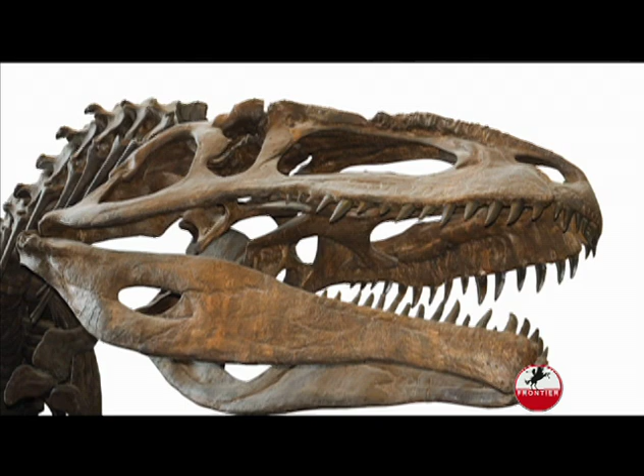Long before us, huge beasts walked the earth. Little did they know that 65 million years later, they would be helping to move our society forward. Natural gas and petroleum are created from the remains of plants and animals. When nature mixed their remains with mud and covered it by heavy amounts of sediment and high amounts of pressure and heat for millions of years, the matter eventually changed into kerogen, a material found in oil shales. With more heat added, it changed into liquids and gaseous hydrocarbons known as fossil fuels. Three of these are coal, natural gas, and petroleum.

Early civilizations used petroleum from oil pits for lighting, and according to the Greek historian Herodotus, the Babylonians were able to use oil and asphalt to build their towers and walls. The Romans perfected the use to build up their empire, but the science of removing oil from deep within the earth would come from the other side of the world. In 347 AD, Eastern cultures such as China and Japan were the first ones to drill for oil using bamboo poles with drill bits attached to the ends. Some of these wells were as deep as 800 feet.

First written about in the mid-800s by the Persians, the process of distilling crude oil into a kind of kerosene, as well as other hydrocarbon compounds, developed into an art form. By distilling oil, same way you would alcohol, you could get kerosene out of that. And that's kind of how oil began. The goal was to create a clean and safe lighting material, and many tried. It was only in the 1840s when Gesner and Young advanced the distillation process into what is known as kerosene that this became a reality.

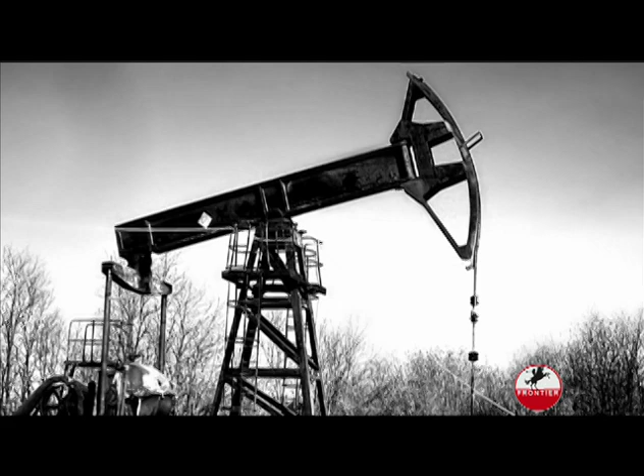One problem still remained. Because of the process it took, kerosene was very expensive. So for some time the main fuel was whale oil from the blubber of various whale species. Then in the 1850s, the process to distill kerosene from petroleum was perfected, which provided a cheaper alternative to whale oil. The demand for petroleum grew quickly around the world, and the first commercial oil well was drilled in Poland in 1853. Gasoline as we know it today had little use at the time.

Kerosene was the primary product, and gasoline was just considered a waste byproduct. It was so unappreciated that gasoline was even dumped into rivers. But that would all change with the invention of the internal combustion engine and then the automobile. It really took off as we started driving cars. With the increase of the number of automobiles and even more uses for fuels, the industry focused on petroleum as gasoline, and it became the primary product that it is today.

Within no time, the need for oil was huge. In the United States, demand of fuel led to oil booms in states such as California, Oklahoma, and Texas. With these booms, the U.S. overtook the Russian Empire as the top petroleum producer in the world.

Years later, on a prairie in southern Wyoming is where Frontier Refining's history began. Capital Oil and Refining Company was started by two Cheyenne entrepreneurs in 1934. By 1940, the company became the Frontier Refining Company, and its production capacity increased to 1,800 barrels a day.

During World War II, petroleum was very important for the war effort. It kept jeeps, tanks, and airplanes in the fight. In Europe, the Allies bombed Axis industry, including oil production facilities. While the bombing continued with the goal of decreasing enemy gas power, here at home the U.S. government was looking to produce more. They were specifically looking for an inland source of 100-octane aviation fuel.

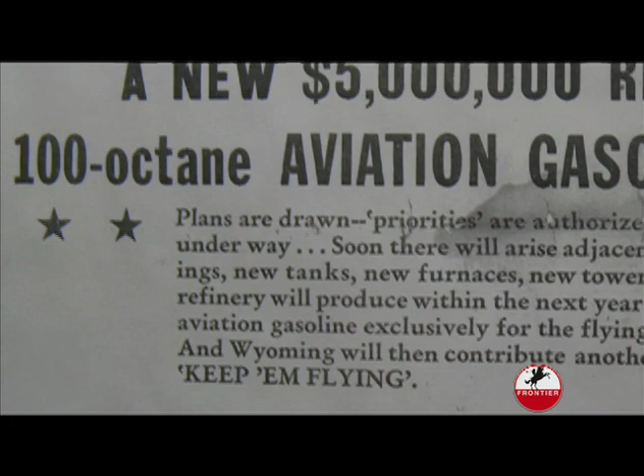After much lobbying by Wyoming politicians, it was decided that 2 refineries would be built in the state, one at Parco or Sinclair, Wyoming, and the other one adjacent to the Frontier Refinery in Cheyenne. Frontier oversaw the construction and operated the refinery for the government. At the end of the war, Frontier purchased the refinery and converted it to produce automotive fuel and other petroleum products.

Up to the mid-1950s, the world's primary fuel was coal, but this would soon change as oil made its way to the forefront for our energy needs. In 1957, Frontier had what at the time was a simple yet revolutionary idea. To clean up the look of the refinery, why not add some color? Frontier was the first to paint its tank farm with pastel paint, leading to a practice that has become common

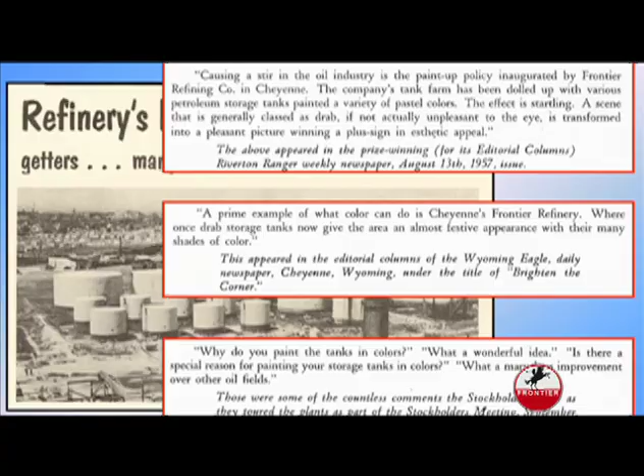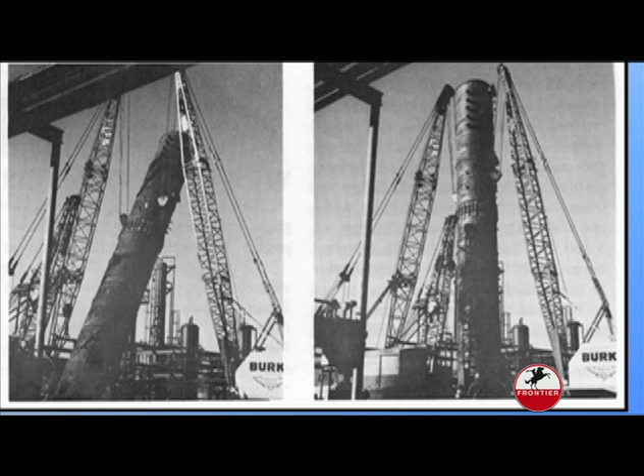in the industry. Throughout the years, Frontier continued to move forward, whether supporting our national defense, expanding its own facilities, adding new technology, increasing its capabilities, or just being involved in the local community. For Frontier, the focus always has been on creating usable materials while calling Wyoming home.

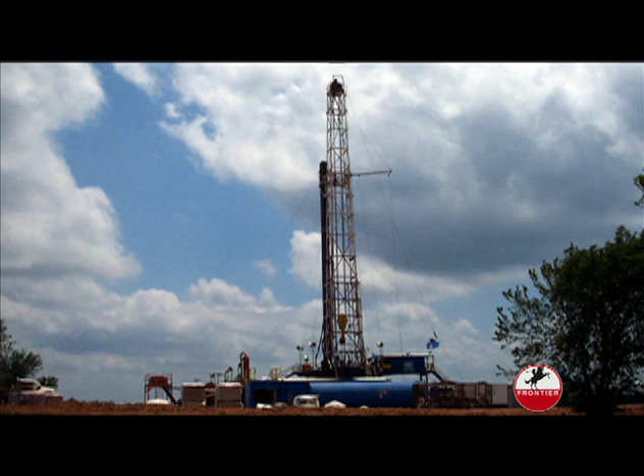Politics and world situations have always had an effect on economies, and petroleum is no different. Yet despite the oil crisis of the 1970s and the challenges the world faced at that time, Frontier Refining continued to produce. Today, the top 3 oil-producing countries are Saudi Arabia, Russia, and the United States. And in the U.S., petroleum makes up 40% of our total energy consumption. Gasoline is a portable energy source that powers 90% of our vehicles.

There's gasoline, diesel, jet fuel. We use it for pretty much everything that we transport. Petroleum also works as the base for many industrial chemicals and a host of products, including plastics. Pretty much everything that we use, oil has something to do with it. Frontier Refining can refine 52,000 barrels per day and employs 280 locals. Frontier continues to serve the needs of the Front Range, and most of the fuel in Cheyenne is bought directly

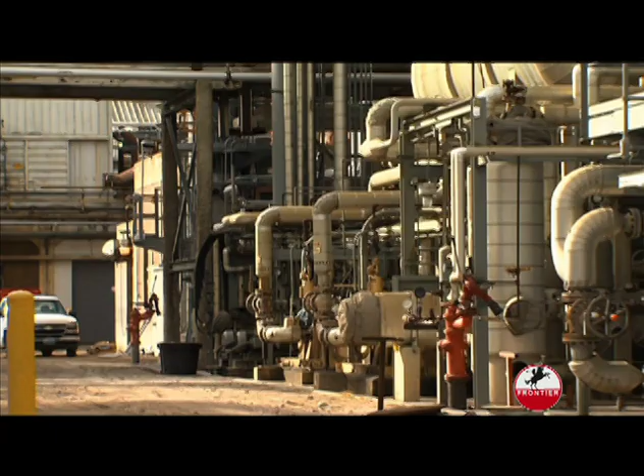from the refinery. The progression of petroleum has been a long one, from the fossils of the earliest life forms to the innovations of ancient civilizations, from the kerosene that lit our way to the substance that powers our daily lives. With all the materials that can be created, petroleum is known as the mother of all commodities. And then, of course, it's come to what it is today. We're basically dependent on it. And at Frontier Refining, we will continue to produce the fuel for our future.

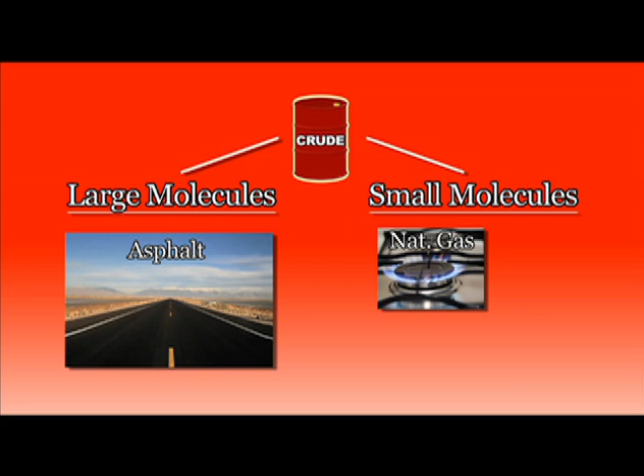Crude itself is a combination of large molecules and small molecules. The large molecules are the molecules like you see with asphalt that goes into the pavement on the street. Some of the small molecules are the natural gas, propane that's used for heaters, butanes, all of those things; the gasoline, the diesel components, are all actually occurring in the crude. We use distillation to separate these products. Distillation is a key part of the refining process.

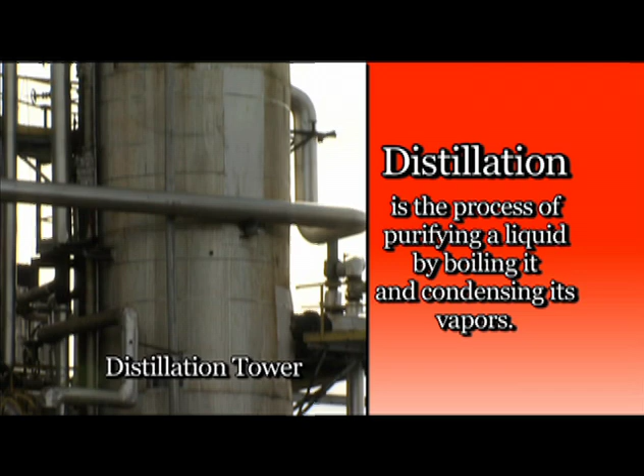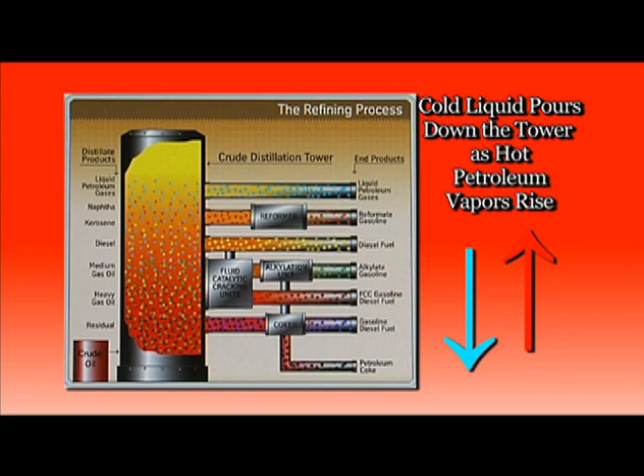You heat up a mixture, part of that mixture will boil, very similar to heating up water on a stove. Part of that mixture will become vapor and rise, just like your water will turn to steam and come out the vent on your teapot. Those vapors rise up the distillation tower, and at the same time, we have cold liquid pouring down the distillation tower. The tower has a number of distillation trays in it, and the contact between the hot vapors and the cool liquid will help the separation between the various molecules.

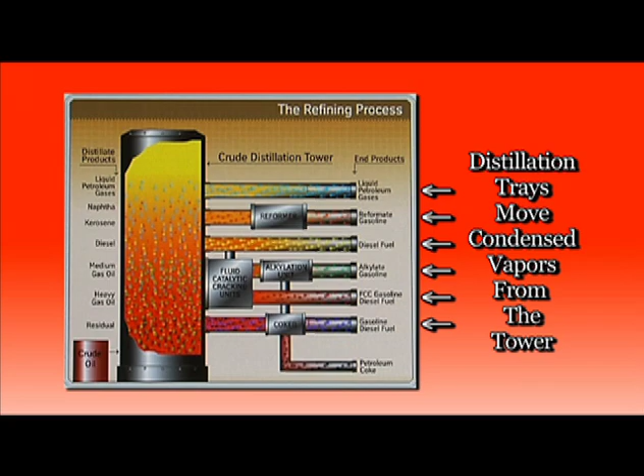The light material will come off the top of the towers. Some of the very light material will become part of our fuel gas that we burn in our heaters. Next range molecules become gasoline type molecules. Then we'll have another set of molecules that come off at a different set of temperatures and pressures that are diesel range. At the bottom of that tower, we'll have a heavier liquid that remains liquid, we call gas oils and the asphalt material. Some of the crude oils we have will have 40% of it will be gasoline and diesel. Some of them will be up to 60% naturally gasoline and diesel.

What we produce here at the refinery is anywhere from 70 to 80% of our crude oil becomes gasoline and diesel. So what that means is we have to take 20 to 30% of the heavy components that exist in crude and convert them into gasoline and diesel molecules. The processes for converting the heavier molecules into gasoline and diesel are the cracking processes.

One is the coker, where we thermally crack the heaviest of the crude molecules into lighter molecules. We take the asphalt that's produced from the crude unit and we feed it to our coker. And in the coker, we thermally degrade the heavy molecules by heating them up to 915 to 920 degrees. The high temperatures will cause the molecules to degrade into the smaller materials such as gas oils, distillates, gasolines, butanes, propanes, methanes, and ethanes. Type of material, again, that you can burn at your house or that exists in gasoline and diesel.

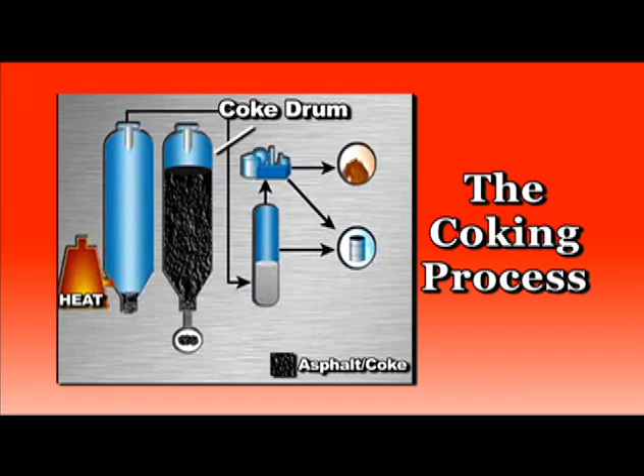The other product that's produced is a material called coke. The coke is like charcoal, coal type material. It comes out of our drums in large chunks. We take those chunks, we crush it down to smaller materials, and it's sent off to various markets, including fuel markets.

The other process that we crack molecules is in our fluid catalytic cracker. The cat cracker, it sits in the middle of the refinery. It's a tall structure. And in that unit, we take what's called gas oil, which is heavier than diesel, a type of material that is used to feed the cat cracker. In the cat cracker, it's mixed with a catalyst that is a lot like sand, a very, very fine sand. This sand catalyst actually flows like water.

In the process, the way it works is you got one vessel that holds the sand-like catalyst. It flows down, mixes with the oil, and then goes up into what we call the reactor. But the reaction actually occurs in the pipe as it goes up into the reactor. The reactor is more of a separation where we separate the products that are produced. The products are all vapor at that point in time. They go out the top of the reactor to our distillation column.

The sand-like catalyst, however, separates out, it drops down. It actually has what we call a coke residue laying on the catalyst, very similar to when you burn wood in your fireplace and you get the soot that's left over in the fireplace. It's a very, very identical type material that's on the sand catalyst.

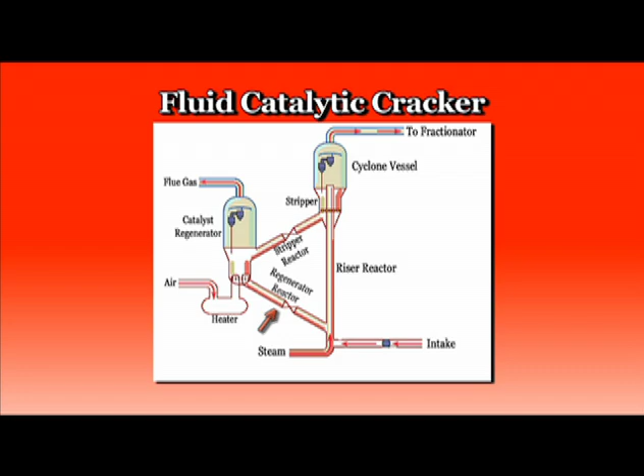It's fed back down, is mixed with air, goes up into the regenerator, and actually that coke is burned off of that sand type catalyst at that time, and that regenerator actually operates at about 1,300 degrees to 1,350 degrees, so it runs very hot in there, and that actually provides the heat for the reaction. That material returns back to the feed, and that is used to heat up the gas oil from around 400 degrees up to 980 degrees, sometimes 990 degrees, to provide this process.

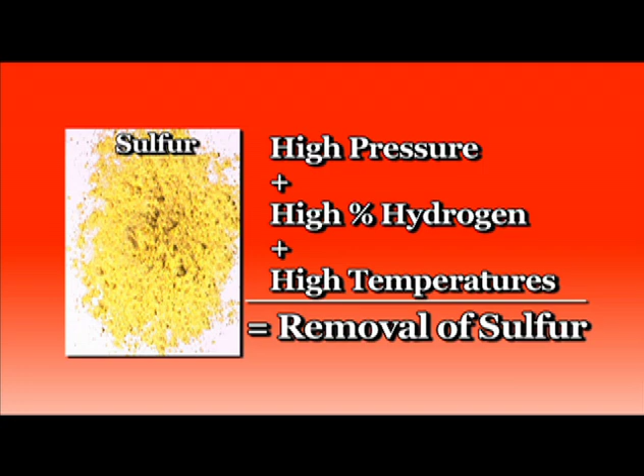The crude, the cat, and the coker are our main units providing feedstocks to all of our downstream units. The rest of our downstream units are there to provide finished products that we actually take to market. We use high pressure with high percentages of hydrogen and high temperatures to run them through reactors to remove sulfur. We treat a light gasoline called naphtha, where again we are removing sulfur, and the naphtha, which is a gasoline range material, then goes through a unit called a reformer. The reformer is kind of a staple of the refining industry for producing the higher octane gasolines needed for today's car engines.

One of the other downstream units we have is called the alky unit. The alkylation process takes some of the lighter molecules, isobutane and butene, propylene. We're able to react those across an acid and produce a very clean gasoline that has very high octane. It is another process that's allowed us to take a high vapor pressure material and make it low vapor pressure with a high octane, which makes it an ideal component for burning in gasoline in your car. The highest of the pressure units is our diesel hydrotreater. This unit operates at 900 pounds pressure with hydrogen.

That high pressure, the high temperatures over a large bed of catalyst allows us to remove the sulfur, which goes off as hydrogen sulfide and replaces that sulfur with hydrogen on the molecules, and so we produce what's called a clean fuel. After the diesel passes through the reactors, the sulfur has been converted to hydrogen sulfide. We have a finishing process to take the hydrogen sulfide out of the diesel, and then the diesel is run through a drying system, then taken to storage where it's ready to be taken to market.

After the break, we will look at one of the local organizations here in Cheyenne and what they do for our community. We'll be right back to Refining the Process right after this.